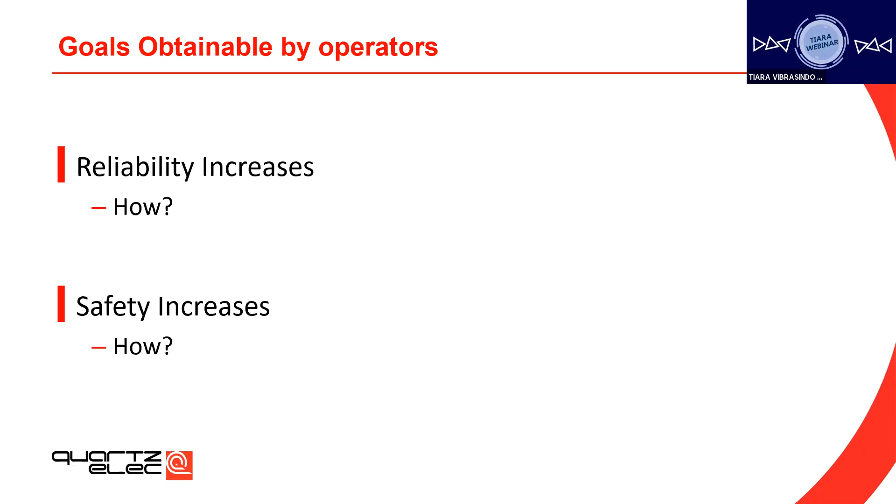I believe many of you have joined from the maintenance department, and these are the questions often asked by your superiors and management. How can we increase the reliability of the machine or increase the life of the machine? How can we run the machine without failures? The answer is to receive alerts to the problems before the fault occurs. And how does safety increase? It's the same as above. You always have to receive alerts to the problems before the fault occurs.

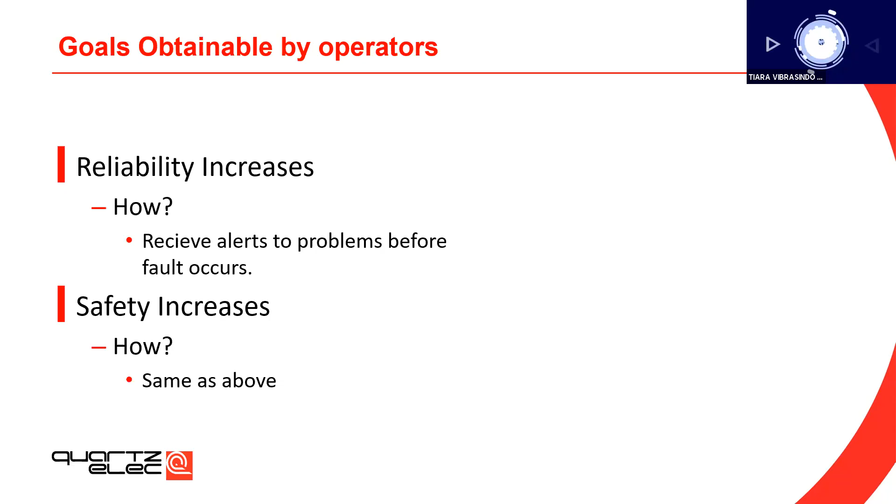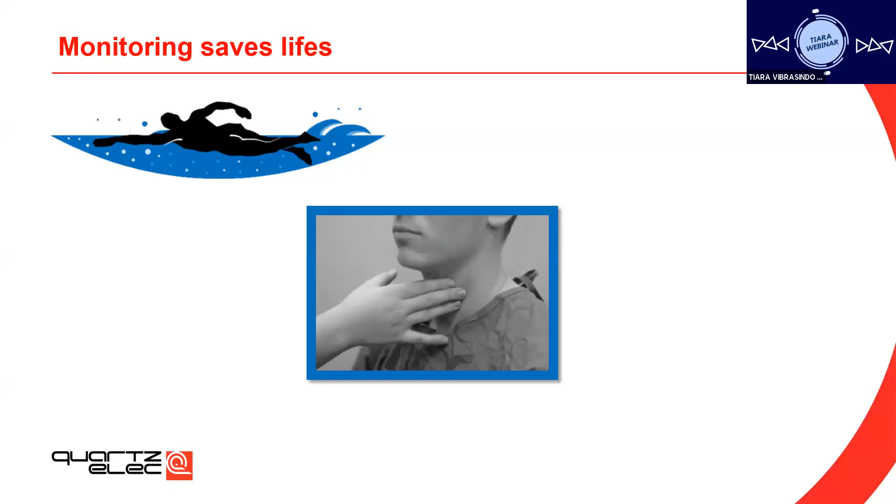This is a slide we can correlate with our daily lives. If you're an athlete, how would you prefer to check the pulse of your body? Would you still prefer the age-old technique of placing the fingers on your neck and measuring the pulse? Or would you prefer modern methods like health tracking systems, which show you heartbeat, number of steps you walked, sleep cycles, and whatnot? Frankly, this is how condition monitoring techniques have also evolved in modern days.

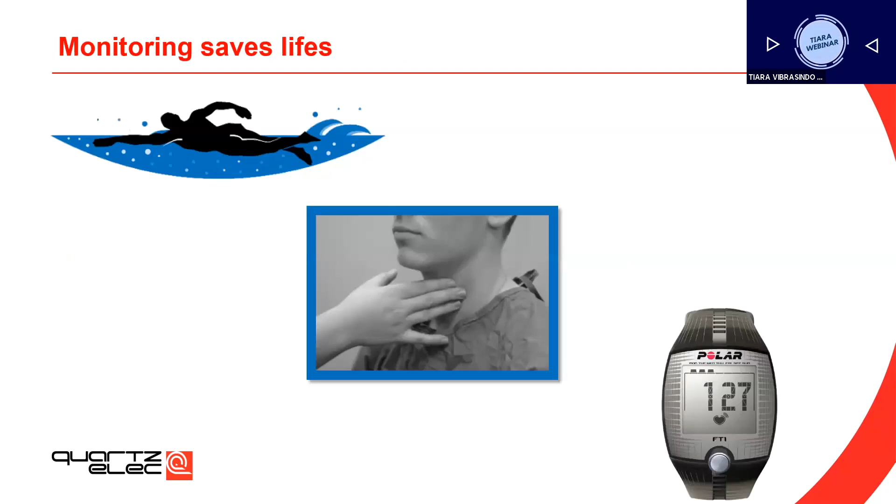The market drives mainly on aging infrastructure, rising costs to replace equipment, longer lead times for new equipment, and increased pressure to operate 24/7. Here are some of the benefits of using monitoring diagnostics. You can always avoid unplanned outages by having alerts before the faults, lower the maintenance costs, defer capital expenses by extending the asset life, and enable better decision making for the maintenance team.

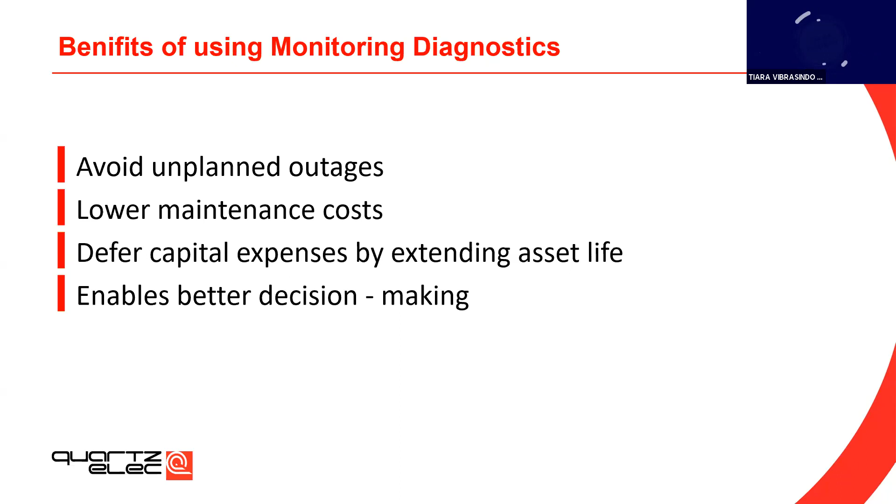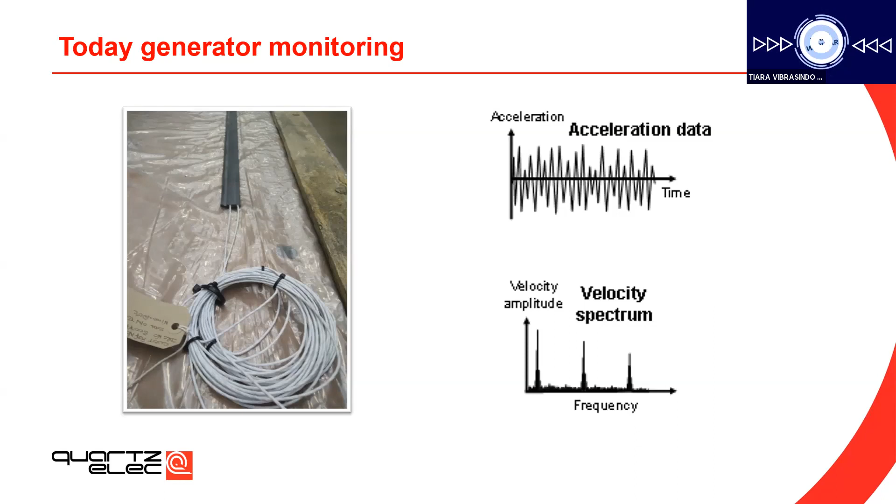Most of the machines are equipped with simple accelerometers and some vibration sensors. The question is, are these enough to monitor your machine's health to avoid catastrophic failures? Let us find out.

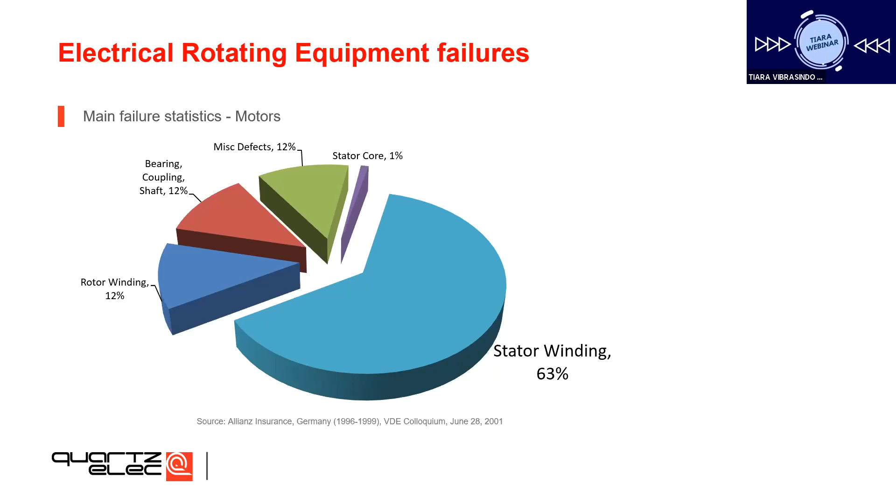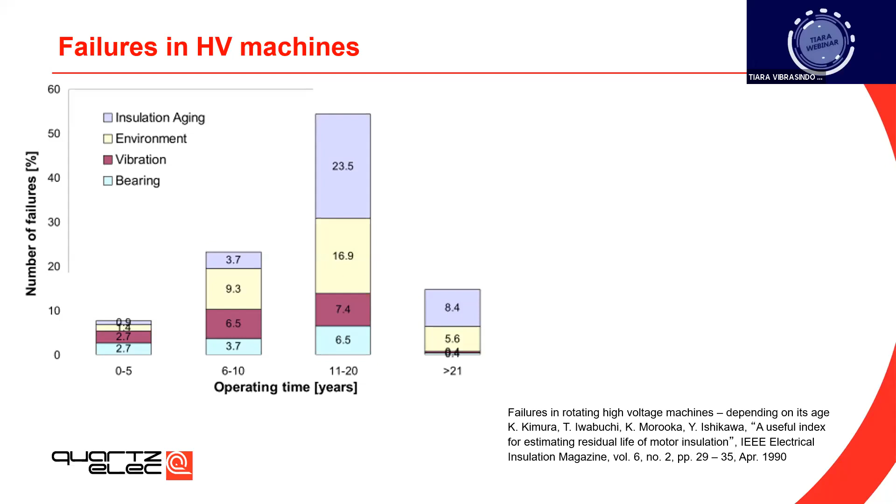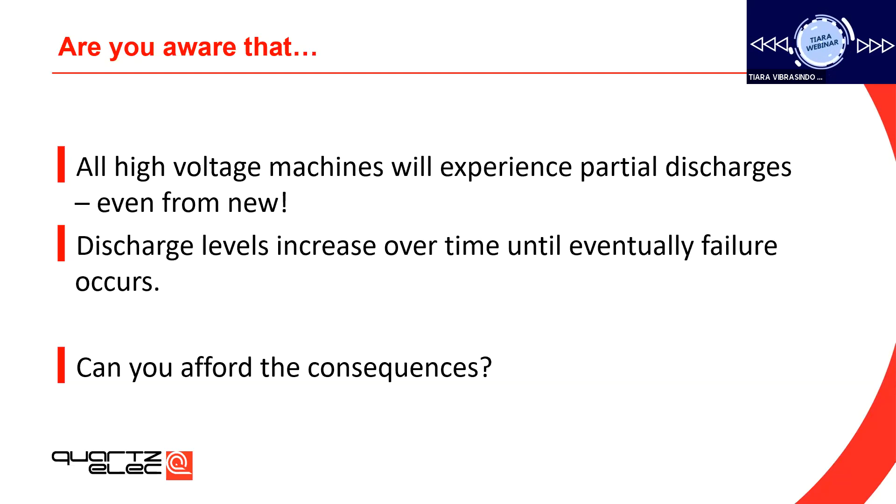I hope the slides we showed you have convinced you of how important monitoring your assets is. Just to add one more point, all high voltage machines will experience partial discharge, even from new. Discharge levels are low when the machines are new, but the levels increase over time, which will eventually cause failures. Can we afford these consequences? Of course not.

Let us now discuss more on partial discharge and its characteristics in rotating machines. What is partial discharge? A partial discharge is an electrical discharge that partially bridges the gap between the conductor and earth, or it can also happen between the layers of insulation or the insulation and the conductor. Technically, it can happen anywhere there's a junction between two electrical components. Partial discharge always happens between these two junctions, not completely bridging the gap, but occurring at some point between them.

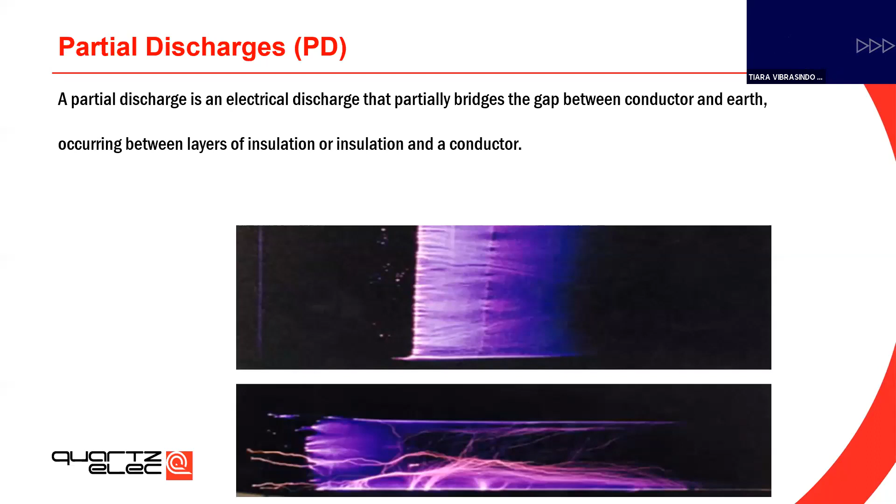So what are the conditions for PD? When a potential difference builds across an air-filled void due to the capacitive voltage divider, PD occurs if E is greater than 3 kV/mm. That is, the electrical stress exceeds the electrical breakdown strength of gas. The larger the void, the larger the discharge is.

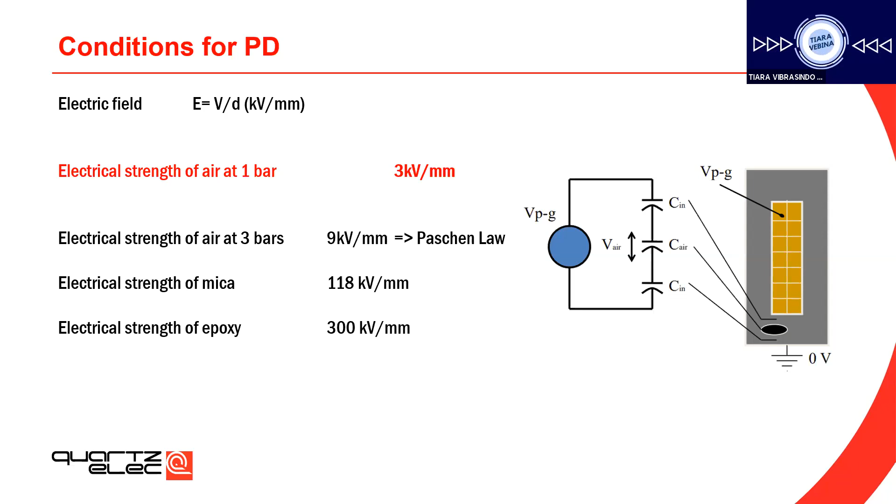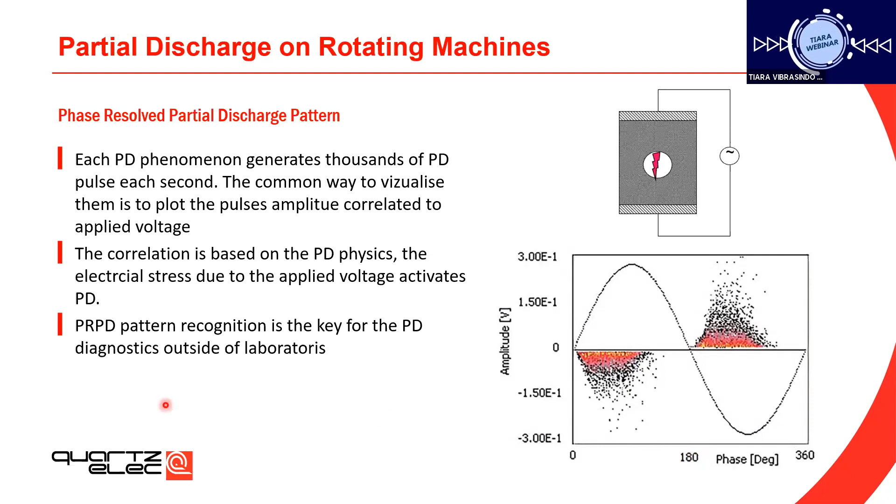We use the following PD test standards: IEC 60034-27, online partial discharge measurements on the stator winding insulation of rotating machines. Next one is IEEE 1434, which is a guide for the measurement of partial discharge in AC electric machinery.

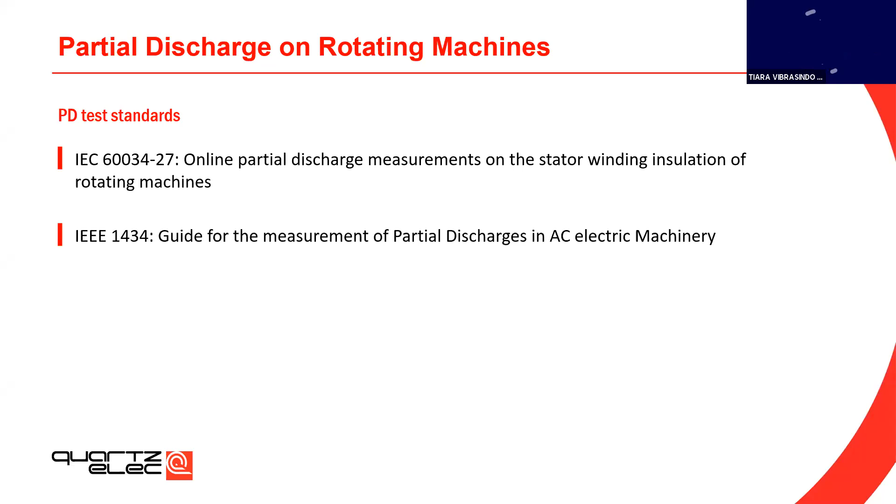We now move to the next section, which is very interesting, the causes of partial discharges. We come across customers who always ask if their machine has partial discharge. We say it is better not to argue with physics. As we have seen in earlier slides, every machine with voltage above 3 to 4 kV might suffer from partial discharges. So what causes partial discharge? Here is the introduction to TEAM stresses: thermal, electrical, ambient, mechanical. Together, we call them TEAM.

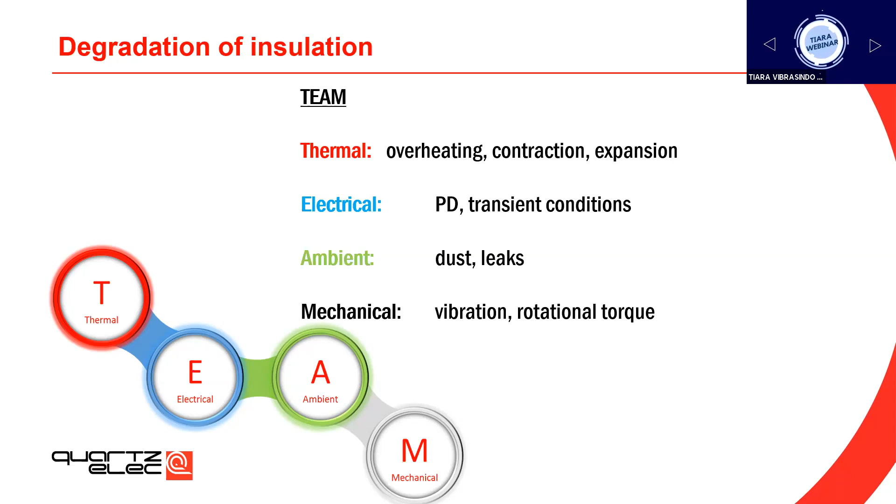The main cause of the partial discharge on rotating machines is TEAM stresses. TEAM means thermal, electrical, ambient, and mechanical stresses. We will go into each of the TEAM stresses in detail in the coming slides. The result of each of these causes is partial discharge. In general, effects we can identify by monitoring partial discharge on rotating machines are loose wedges, bar vibrations, slot discharges, broken conductors, end winding contamination, discharges between phases, delamination of the main insulation.

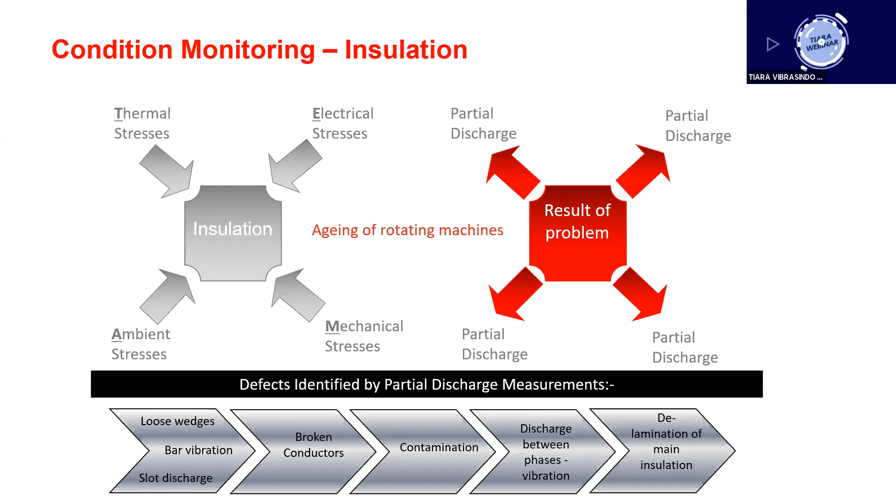Thermal degradations. These are one of the most common aging mechanisms. Studies state thermal stress results in relatively slow insulation degradations. So what are the reasons for these thermal degradations? The reasons are operation losses, for example, starts and stops of the machine, changes in the load, circulating eddy currents, sometimes the poor cooling design itself. Interestingly, every 10 degrees increase in the temperature decreases the remaining life by 50%.

As you all know, stator winding insulation is made of different materials, and different materials have different expansion characteristics. So what happens during the load cycling? Due to these different thermal expansions, loss of bonding between the conductors and insulation happens. This will eventually create voids and then PD.

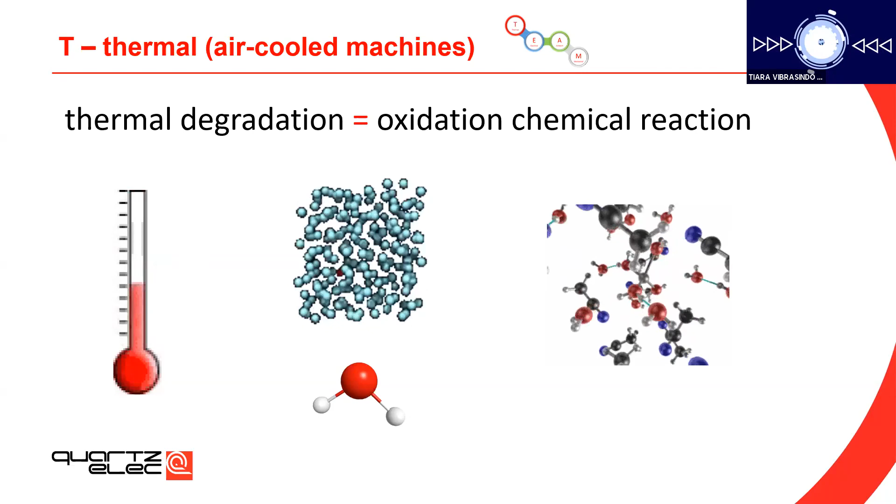The traditional way to measure winding temperatures is by RTDs and thermocouples. Actually, these sensors show lower temperature, up to 5 to 20 degrees, than actual copper temperature. Therefore, are these sensors good enough to alert thermal changes in your machine? We have to question ourselves. Having a PD monitoring system on your machine gives you better visibility of what exactly is happening with your stator windings.

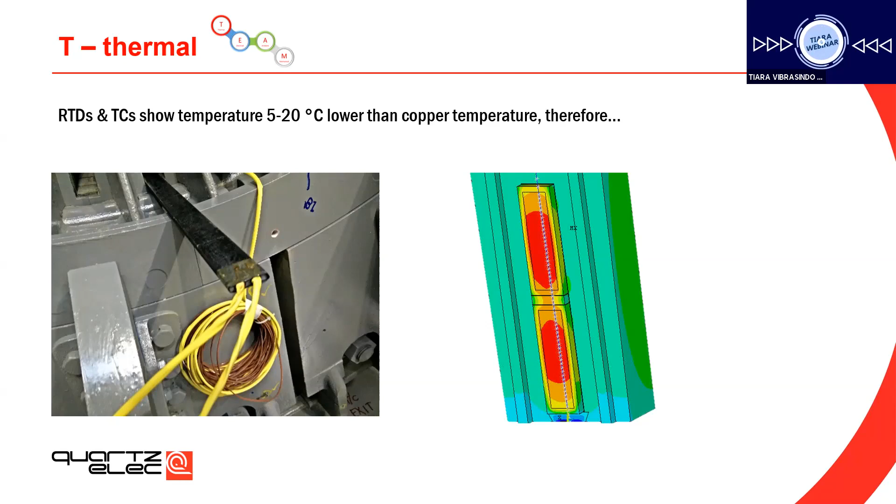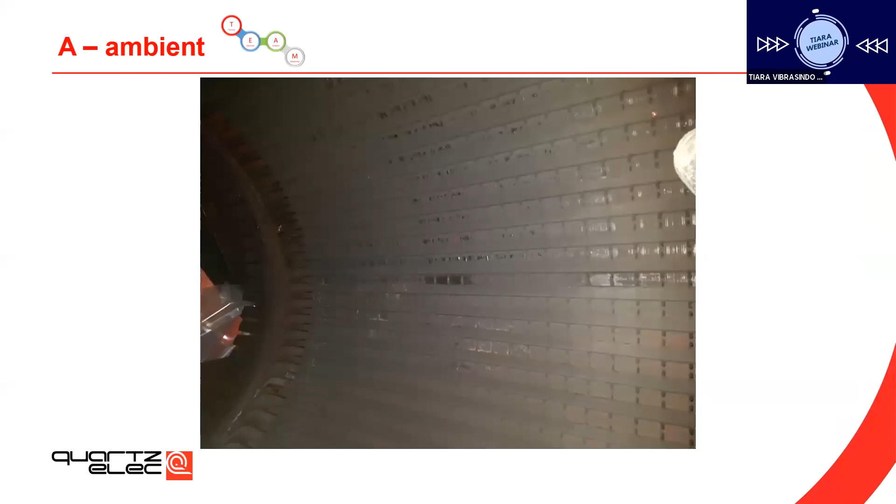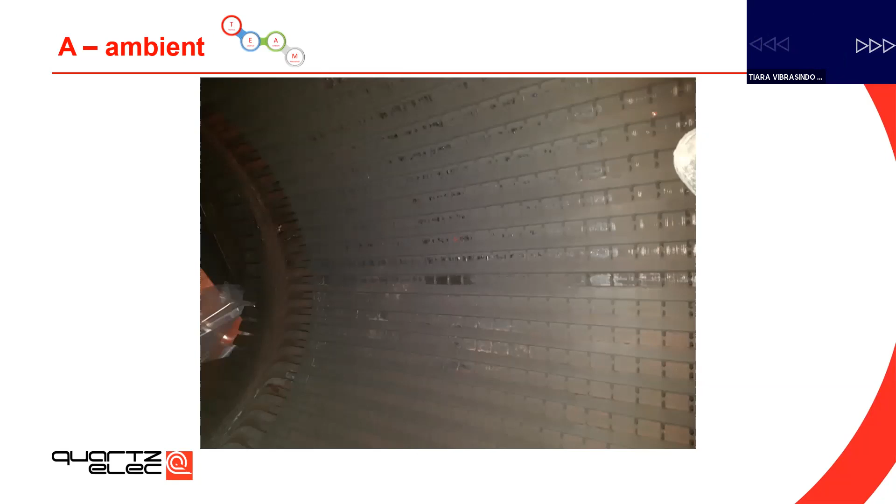Winding contamination plays a major role in the ambient stresses. These create tracking across the spaces between the coils of different phases. This also degrades the mechanical supports and surface insulation. Contamination together with moisture creates surface tracking which can contribute to insulation failures. Sometimes improper ventilation and heating speeds up these problems. The effect of ambient stresses on the winding is typically a long-term aging process. This will be ranging from months to years.

This slide shows you a very good example of the effect of ambient stresses on the windings. We have conducted partial discharge tests two times on the same machine. On the left, before cleaning, that is, the winding is with oil and dirt contamination. On the right, the test has been carried out after the cleaning, that is, after the cryogenic cleaning of the windings. So clearly, on the right, we can see the amplitude of PD has decreased quite a bit. This shows the more the contamination on the winding, the more the PD is.

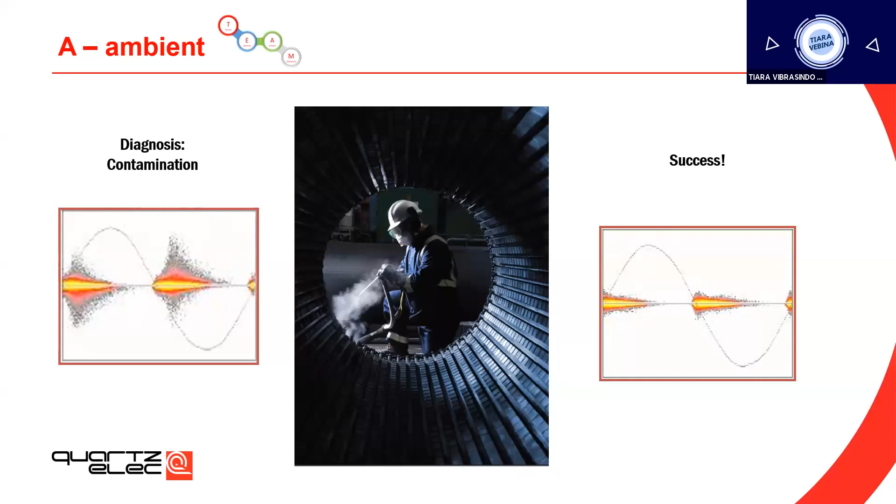Mechanical forces or mechanical stresses. This is the most important member of TEAM forces. In general, the vibration forces increase with the operating currents, which will eventually lead to the increase in insulation abrasion, winding settling, looseness in the wedges, and end-arm support weakness. Mechanical forces are the main causes of slot discharges, end winding strands, and turn cracks. These will lead to relatively quick failures when compared to other forces.

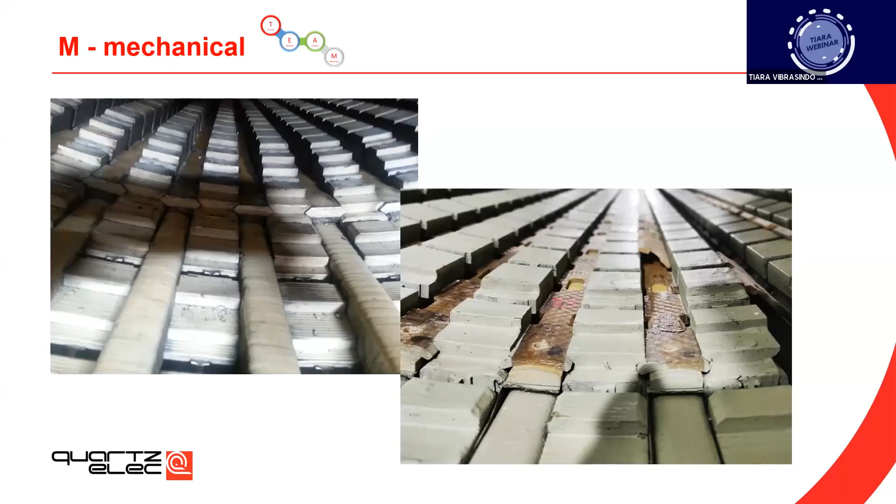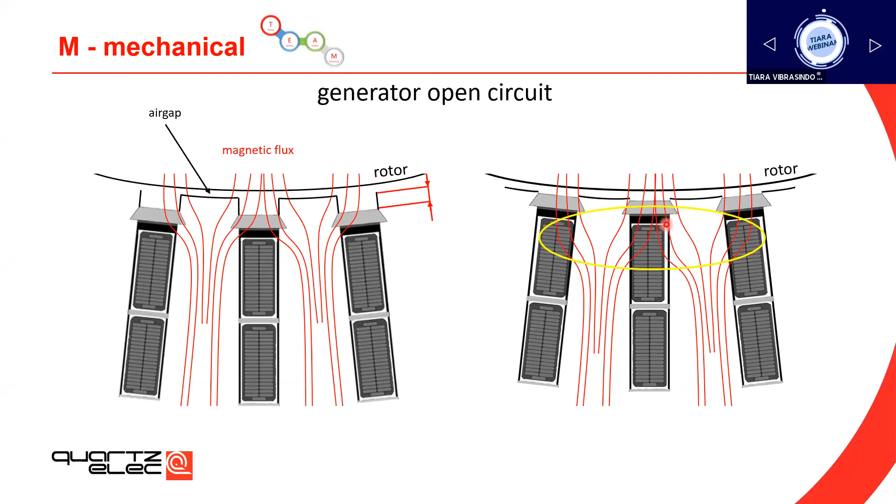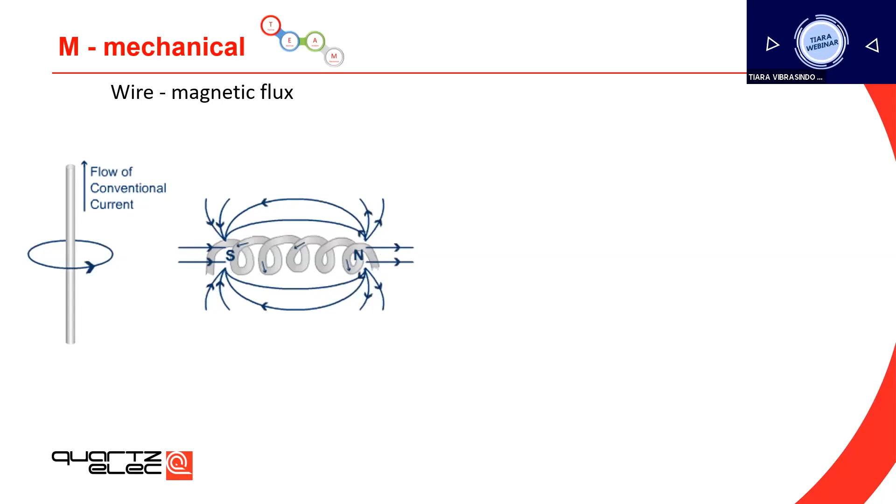You might remember that when a current flows through a simple wire, a magnetic flux is being created around that wire. The same happens when the current flows through the stator winding. And over time, the semiconductor layer can be damaged, triggering partial discharge. This can eventually lead to the main wall breakdown as well.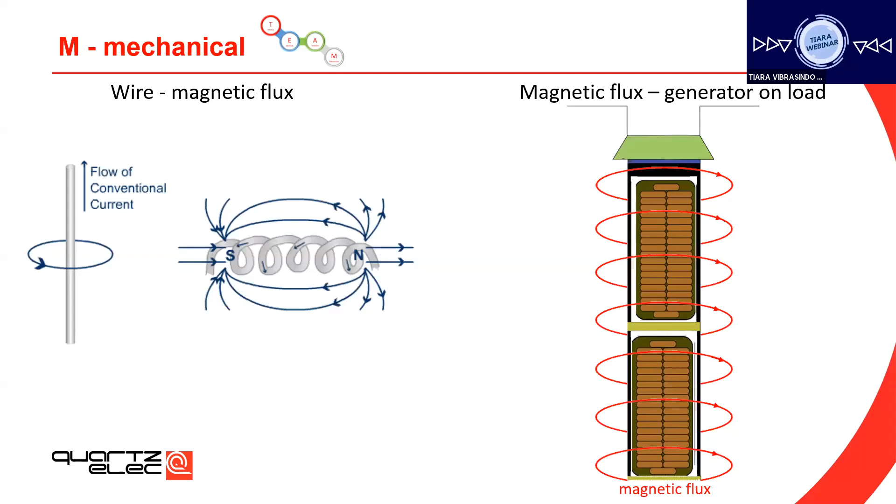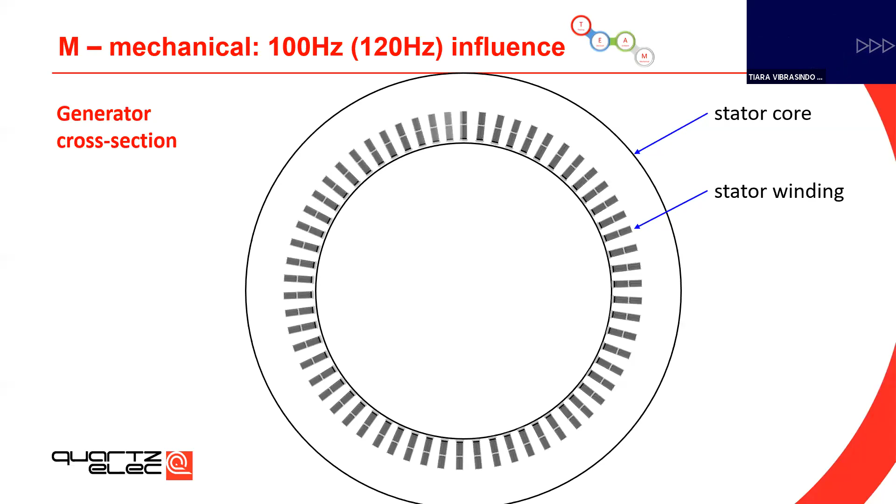Now we'll discuss the effect of resonant frequencies on the machines. That is 100 Hz for the 50 Hz network and 120 Hz for the 60 Hz network. These are the main forcing frequencies for two-pole generators and windings. Your generator becomes oval to some degree because of these forces. Unfortunately,

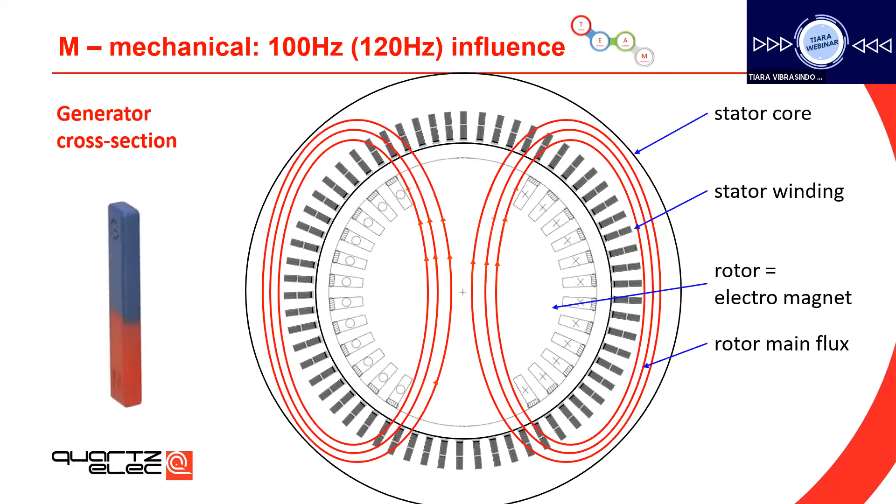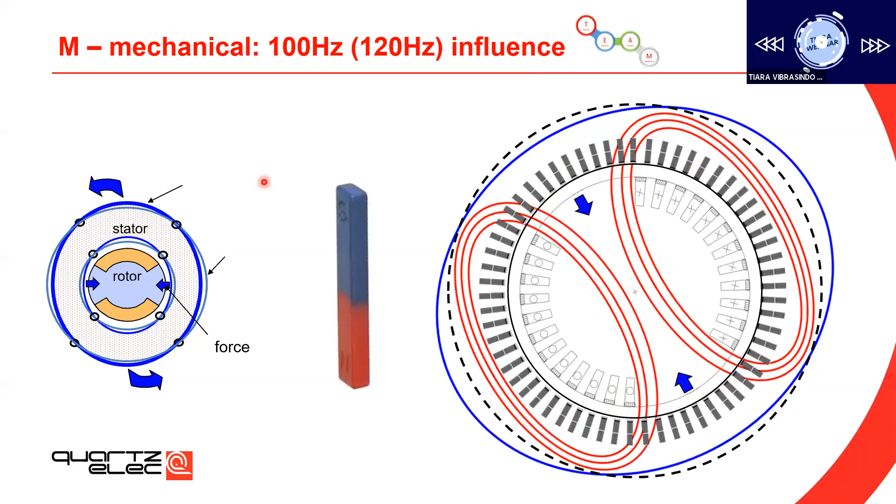remember, two generators, even though manufactured as identical, might still behave uniquely with different natural frequencies. Also, it is worth noting that the natural frequency values depend on the change of temperature. Resonant vibration such as this has been a cause of major failures in the past, resulting in significant downtime ranging from weeks to a number of months, with obvious implications in terms of cost, generator availability, and revenue loss.

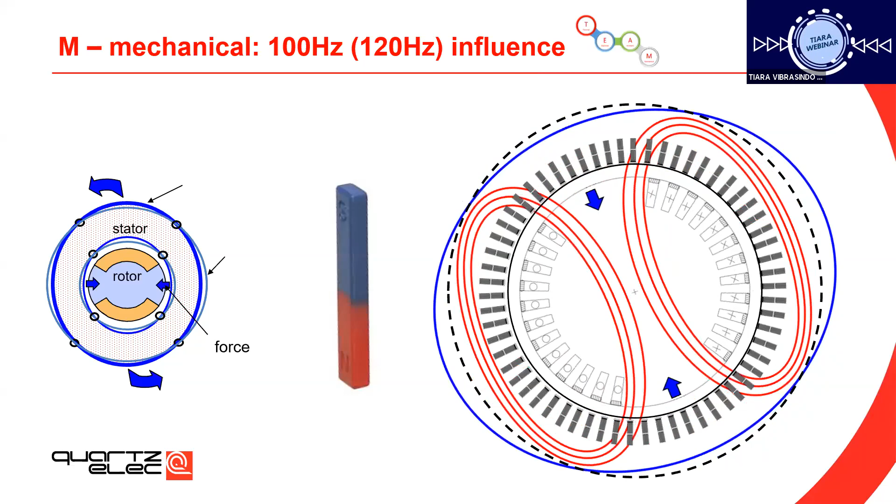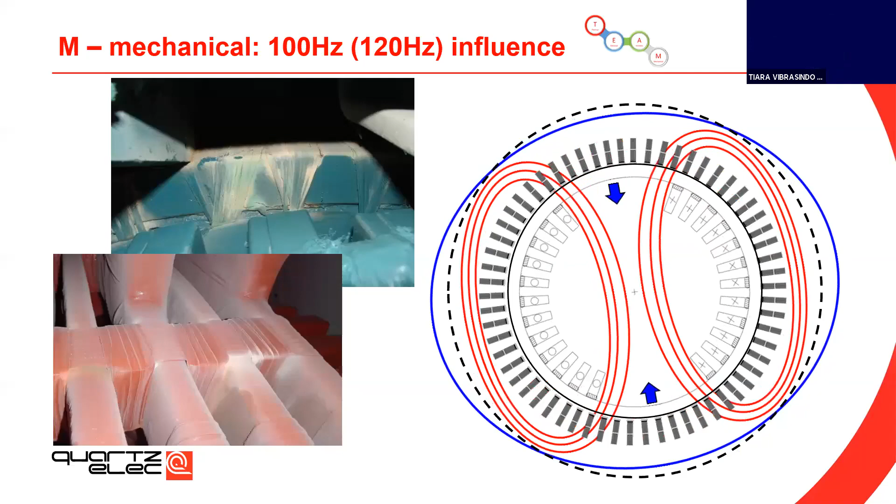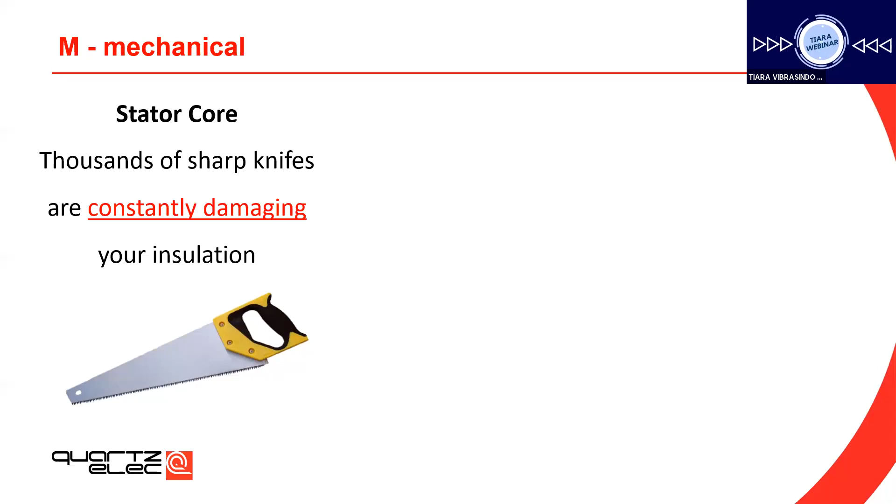The end result of these forces on your machine is what you see in the picture on the left. Just imagine the combined mechanical forces happening on the machine winding, and the winding is vibrating against the rough surfaces. That's right. The impact of these forces is quite severe. It's like thousands of sharp knives constantly damaging your insulation.

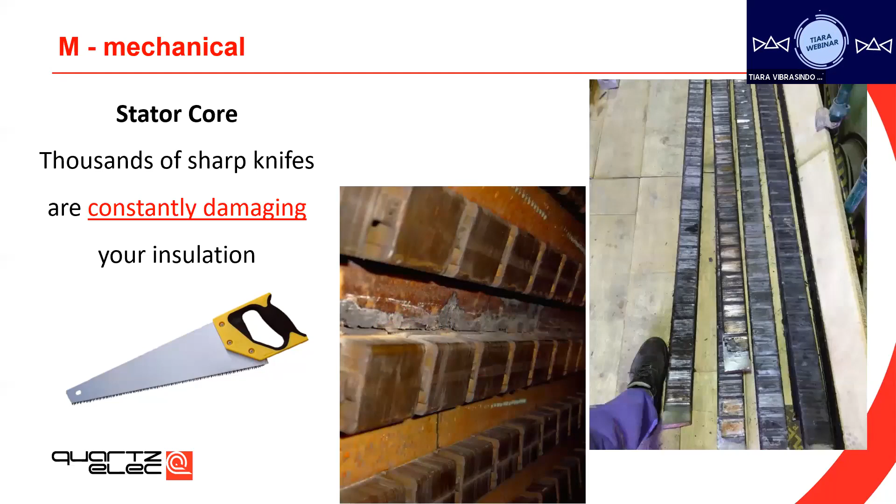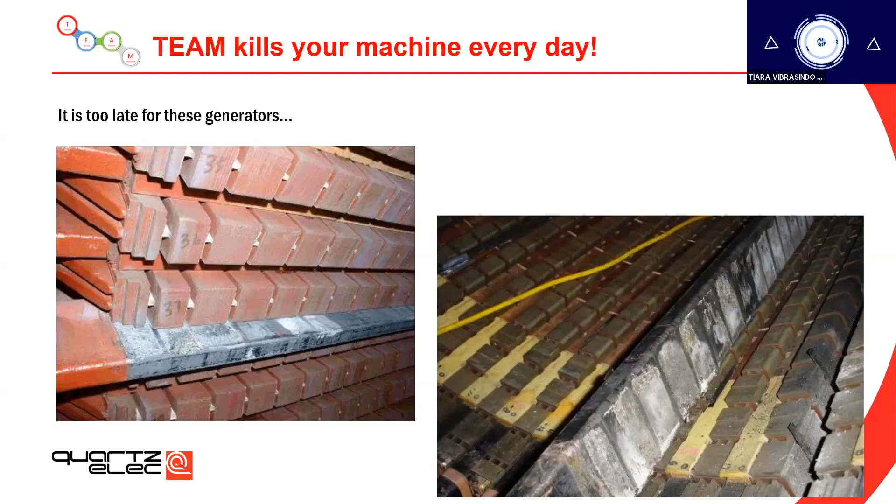TEAM forces kill your machine every day. It's too late for these generators to get life again. Start monitoring and avoid these failures. There are a few other factors other than TEAM which could cause partial discharge on your machines. Those are badly designed windings, clogged coolers, poor winding quality itself, and global VPI technology.

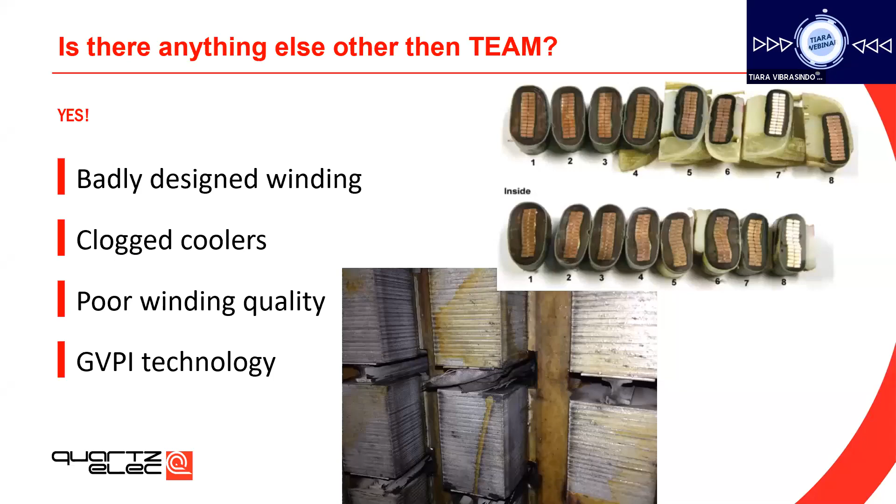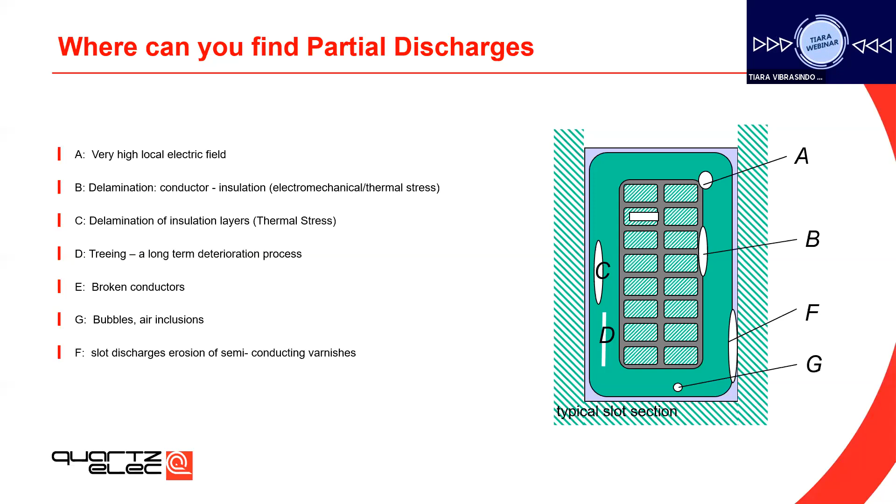Partial discharge is a very fast transient pulse, and this can be measured by various techniques. Some of them are electromagnetic pulse, light emission, ultrasound wave, and electrochemical reactions, which is also called ozone. Any of these can be used to measure the partial discharge. Electrical PD sensing is the most common technique, as this allows us to quantify the partial discharge phenomena.

Let us now get into the new chapter, selection of partial discharge sensors. Before getting into the sensor typology, let us see how to detect the signal itself. The localized insulation defects subjected to the electrical stresses generate PD signals. This phenomenon is the source of high-frequency electromagnetic signals. The conducted signal path can be forced into the sensor and measured, while the irradiated signal is subject to the generator design. Those can attenuate and affect the sensitivity.

Different sensors produce different PD outputs, and they have different sensitivity as well. Some have the sync signal and some don't. Let us discuss the differences between three types of sensors: capacitive, HFCTs, and antennas. Antennas provide very high local sensitivity. But as you know, we require more of these sensors to cover a complete area. The capacitive sensors provide better sensitivity than HFCTs. When it comes to installation, antennas require very high effort. When it comes to safety, antennas provide higher safety compared to HFCTs and capacitive sensors.

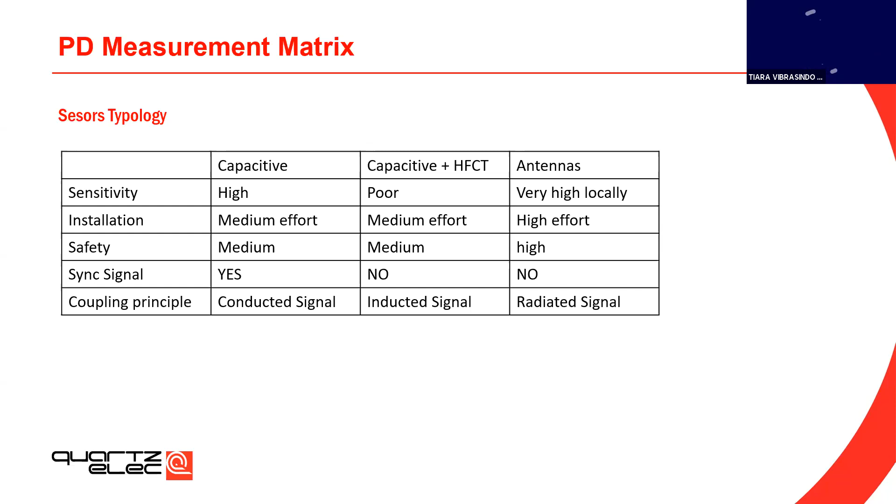Signal attenuation plays a major role in the selection of sensors and also the measurement of the partial discharge signal. Measurements at lower frequencies create noise problems. Measurements at higher frequencies create attenuation problems. Our field experience indicates that using the 1 to 20 MHz frequency range for measurements, with additional digital processing based on the PD pulse characteristics, works very well to detect PD activity in the industrial environment. It also helps to locate a particular area with PD activity and distinguish internal PD activity from external noise.

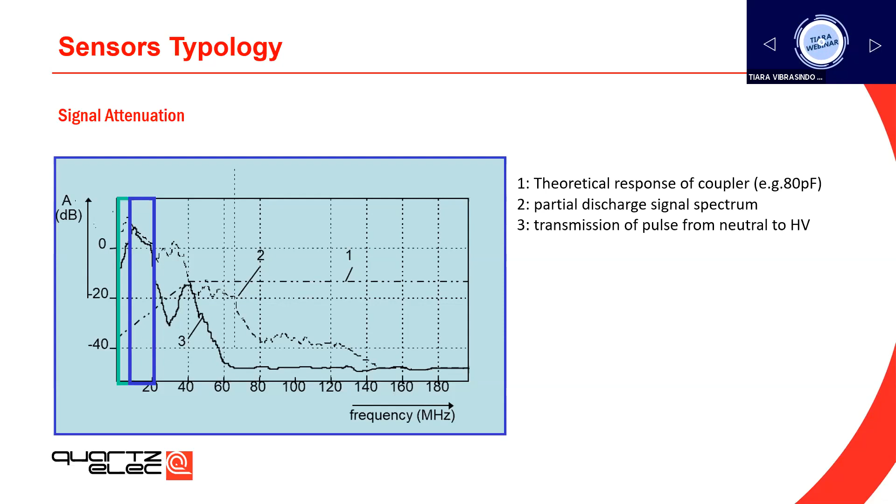When it comes to traditional factory testing, they use a very low frequency band, 25 kHz to 800 kHz, because they have a controlled environment, shielded rooms with very little or no noise. But when it comes to the field environment, noise does exist. So devices must move on to higher frequencies to eliminate the noise.

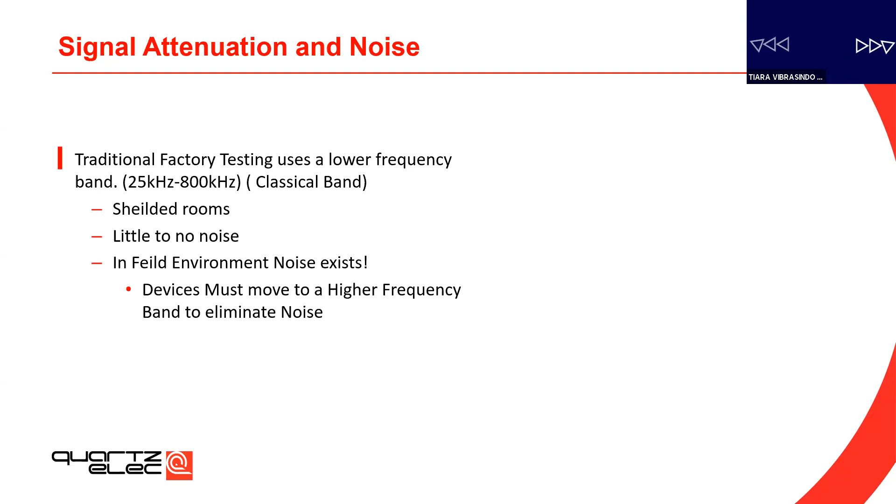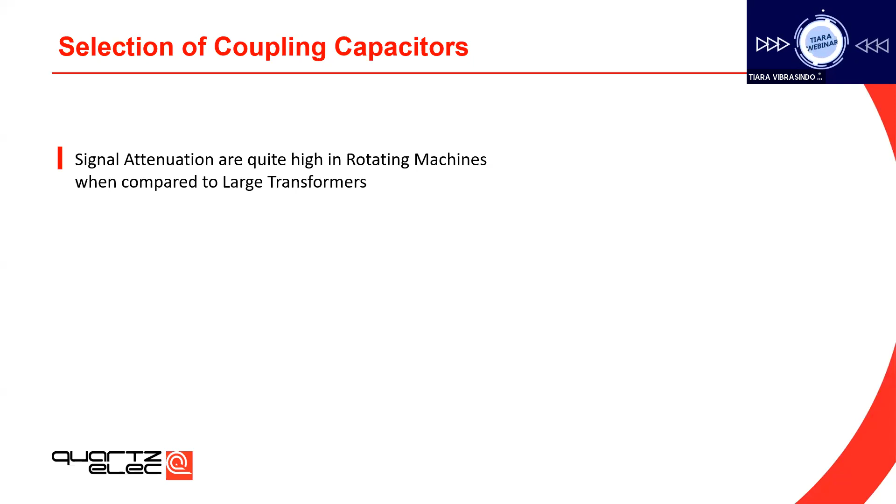These are some of the points which you need to consider before the selection of sensors. Signal attenuations are high in the rotating machines when compared to the large transformers. The higher the frequencies, the more attenuation there is. Noise does exist. The higher frequency you go, the lower the noise floor. But the problem is, the higher the frequencies, the more the attenuation is. Selection of the right frequency band is very important, by compromising between the attenuation and noise.

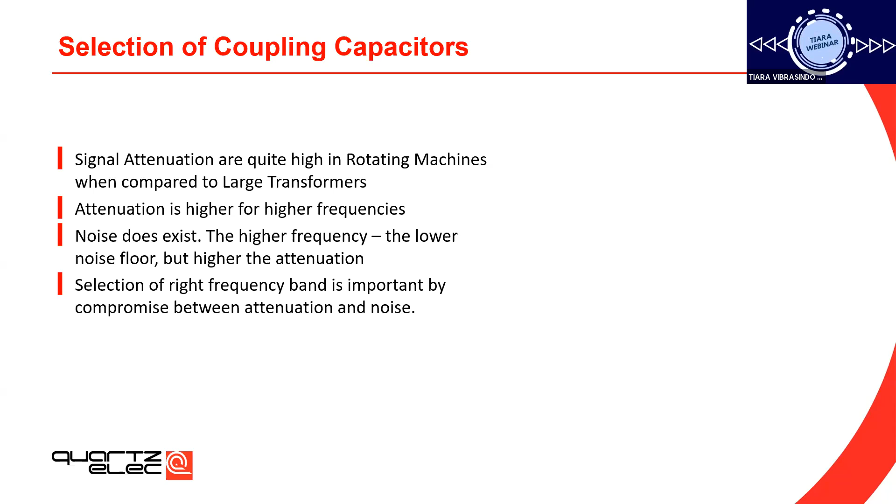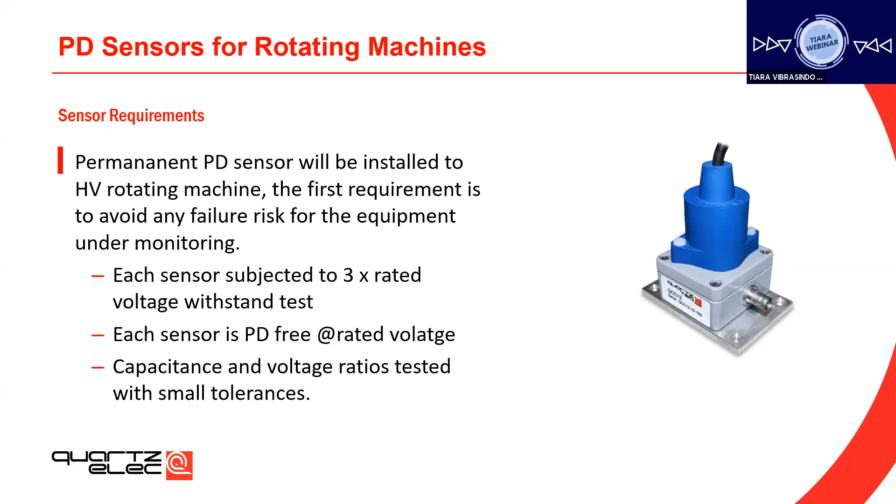The very frequent question asked to us is, can we compare the offline partial discharge data with online partial discharge data? And what is the advantage of having online PD monitoring systems? So let us study some of the differences, advantages, and disadvantages of offline PD and online PD. Offline PD test is carried out usually during an outage where we can connect a temporary PD capacitor coupler. We inject voltage into one of the coils and we measure one by one with a PD portable instrument.

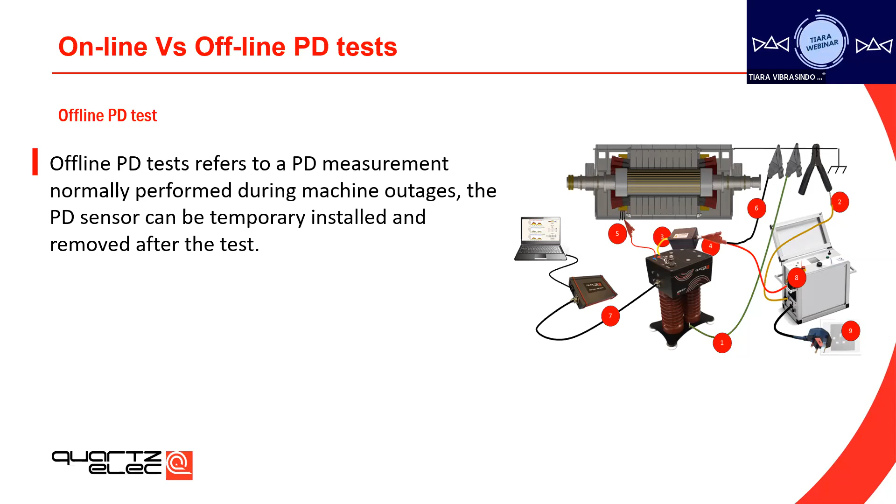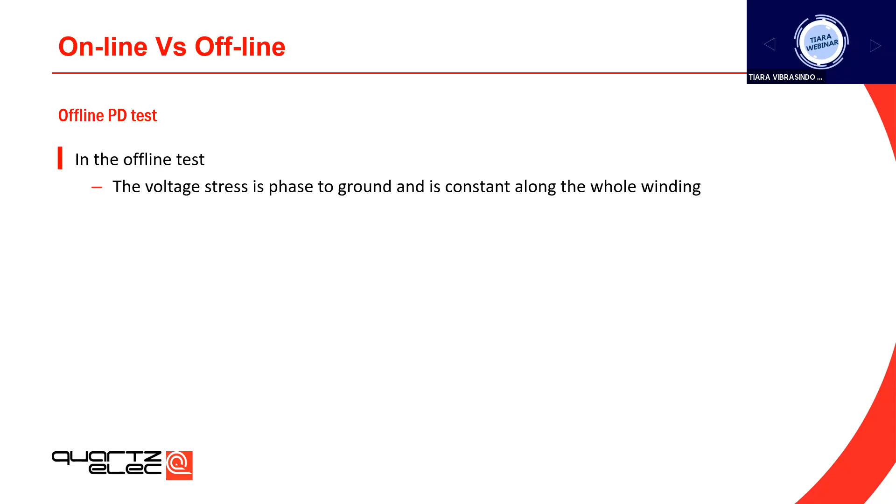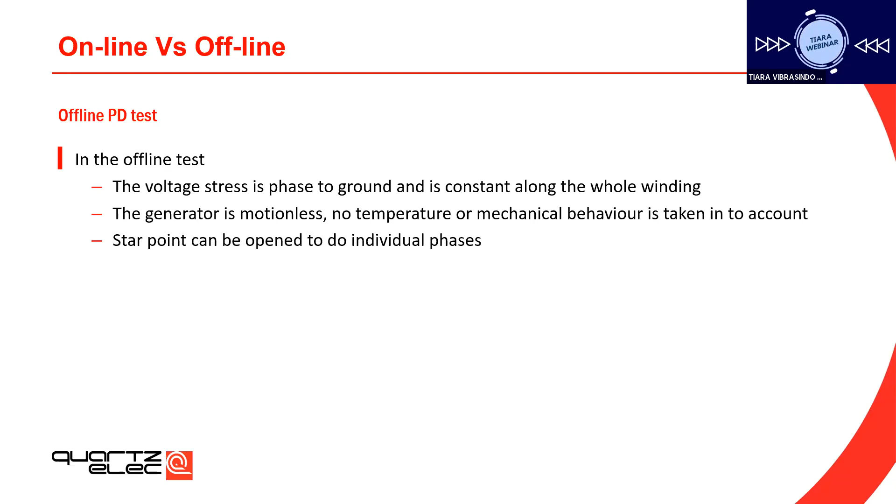These are some of the technicals which you need to know for the offline test. For the offline test, the voltage stress is phase to ground and is constant along the whole winding. The generator is motionless, so there is no impact of temperature and mechanical stresses. The star point, which is also called the neutral point, can be opened to do the individual phases and to compare them. The machine under test is isolated and is free from all the high frequency disturbances.

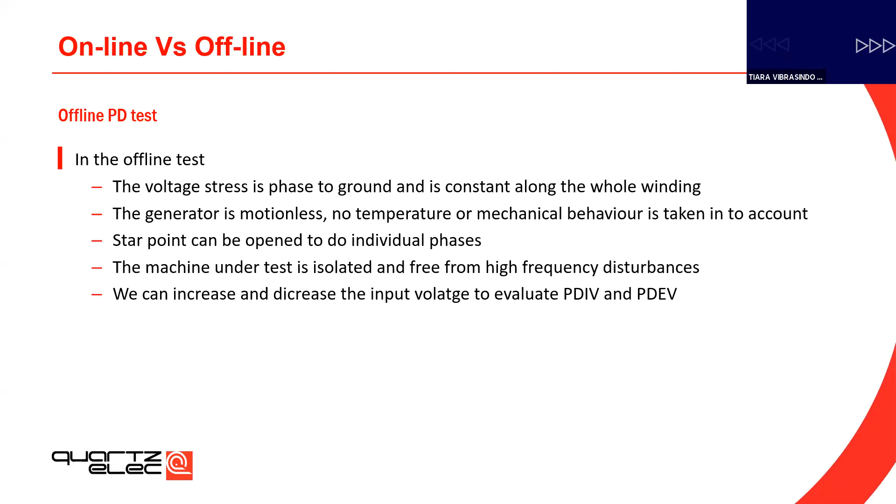One more advantage of this offline test is we can increase and decrease the input voltage and evaluate PD inception voltage and extinction voltage. It is also possible to overstress the insulation with respect to the normal conditions. Online PD monitoring on a running generator requires permanent installation of PD capacitor couplers. We can either measure the PD with mobile or permanently installed PD data acquisition systems.

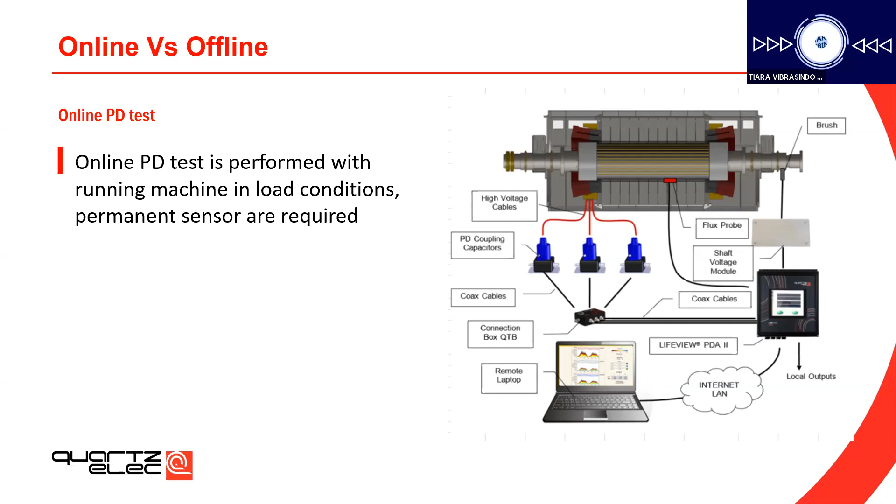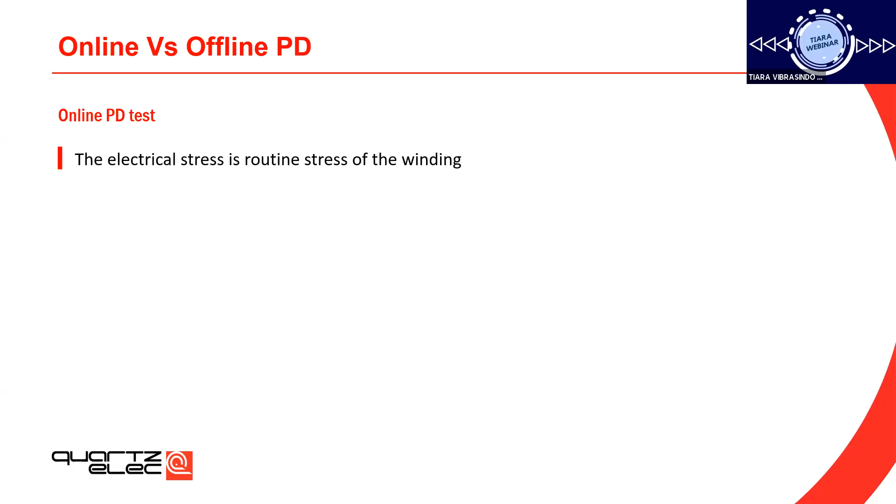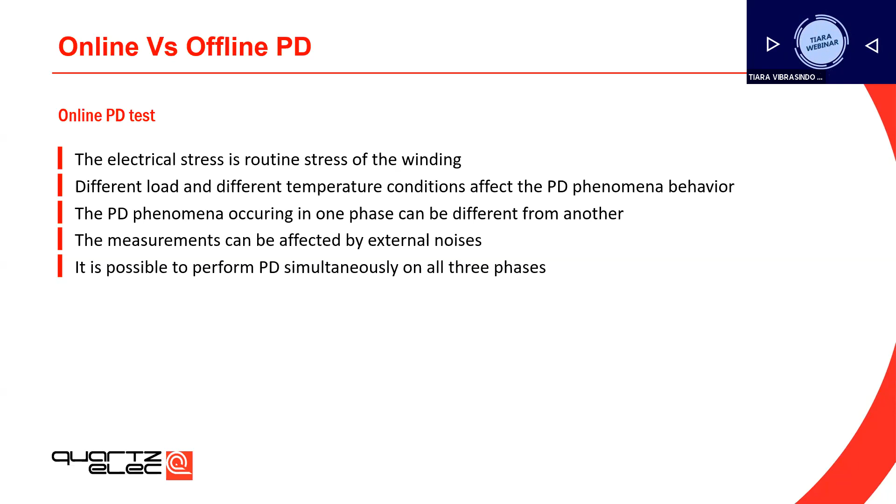For online PD tests, these are some of the technicals which you need to know. The electrical stress in the online test is the routine stress of the winding. Different load and temperature conditions affect the PD phenomenon behavior. The PD phenomena occurring in one phase can be different from another. The measurements can be affected by external noises. It is possible to perform PD simultaneously on all three phases. The permanent PD sensors help to correlate the machine lifetime and provide homogeneous data. Obviously, this can always be performed in a safe condition.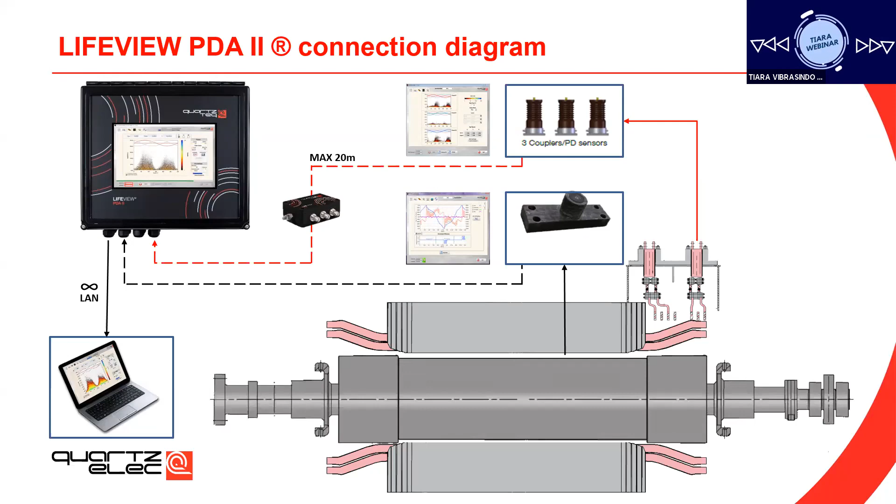In this slide, you can see some of the pictures of our installations. On the right side, it is PDA II monitoring systems. And on the left, you see the coupling capacitors rated for the 12 kV machines.

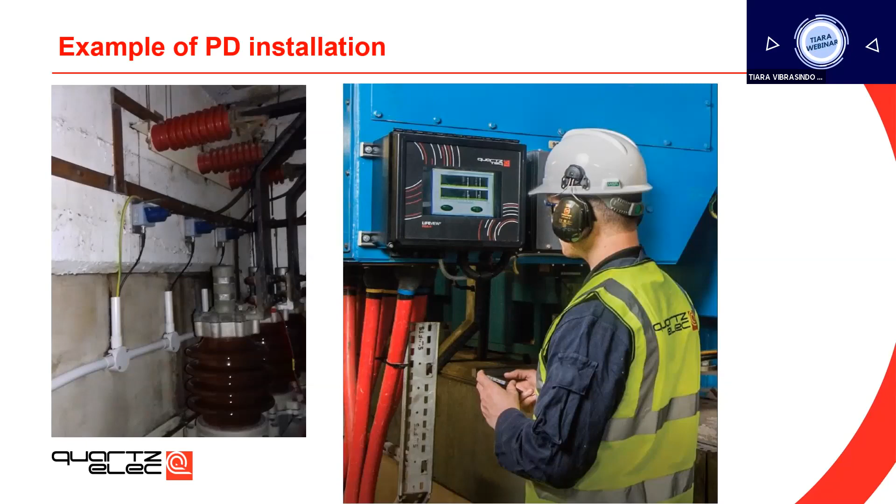Offline tests versus online tests. You guys have to tell me which one is the better one. So as you know, PD has become a standard diagnostic test performed on every HV machine these days. There is, however, a difference between online and offline tests. Both are valuable diagnostic tools, but only one gives you a real picture of your stator winding condition, which is an online test. Online monitoring simplifies the process of trending and makes PD results more visual compared to the offline tests. It helps to understand what is causing PD level changes in an insulation system.

Online monitoring allows us to see the seasonal and other variations in the levels caused by certain dynamics such as temperature, humidity, and load, and to distinguish these changes from the maintenance effects and steady deterioration of the insulation. Online partial discharge levels are also a useful indicator in determining the success and failure of maintenance activities.

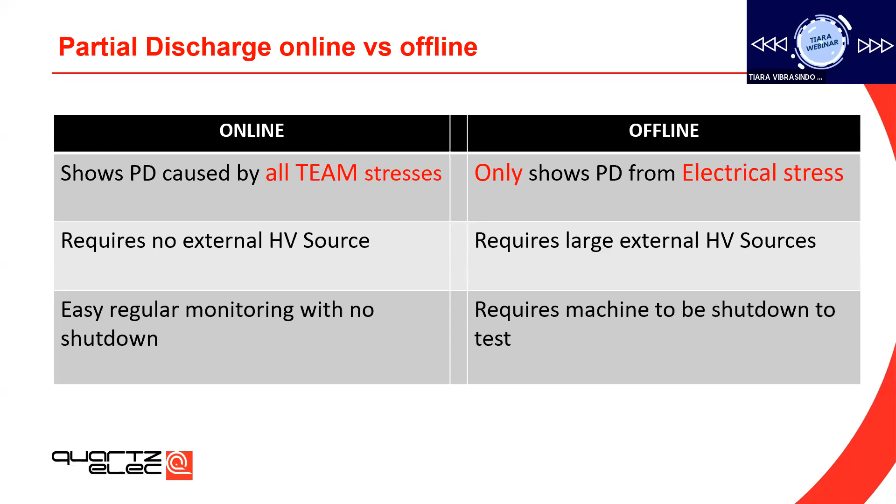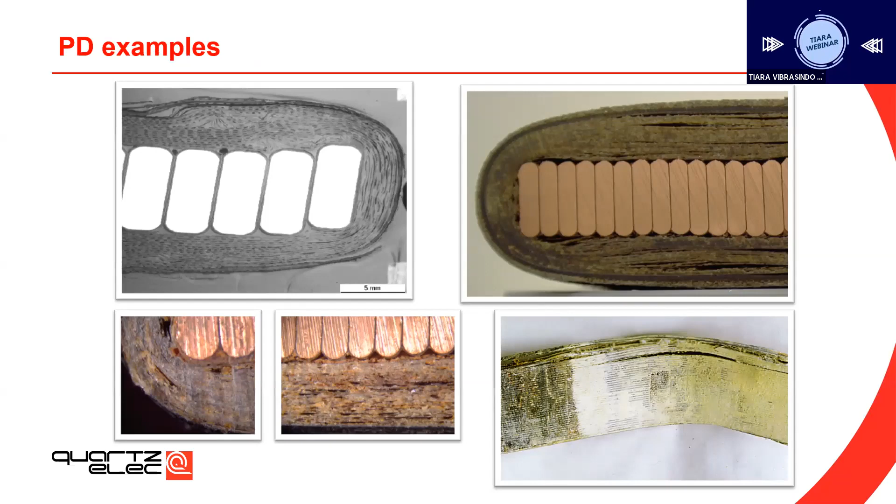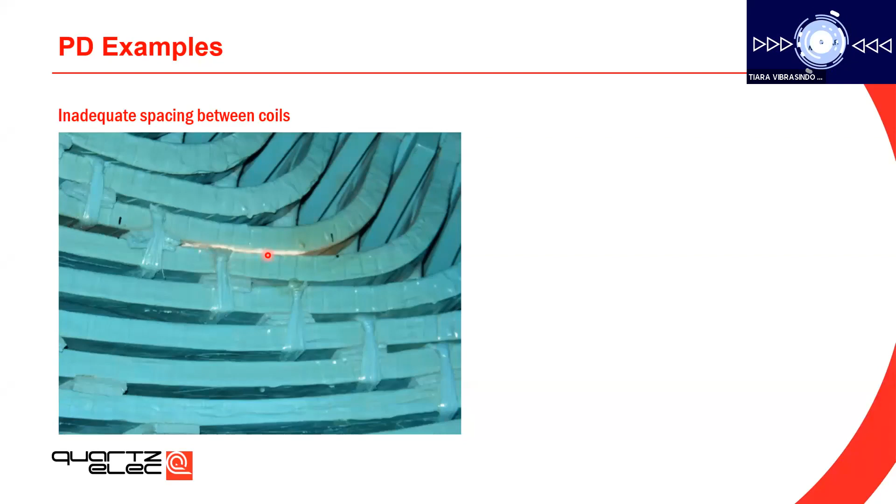Let us see some examples of PD. So here are some of the pictures showing the PD caused by delaminations in the insulation. In this slide, we have a picture showing the PD caused by inadequate spacing between the coils. Here is another PD example. It shows PD caused by loose coils in the slot.

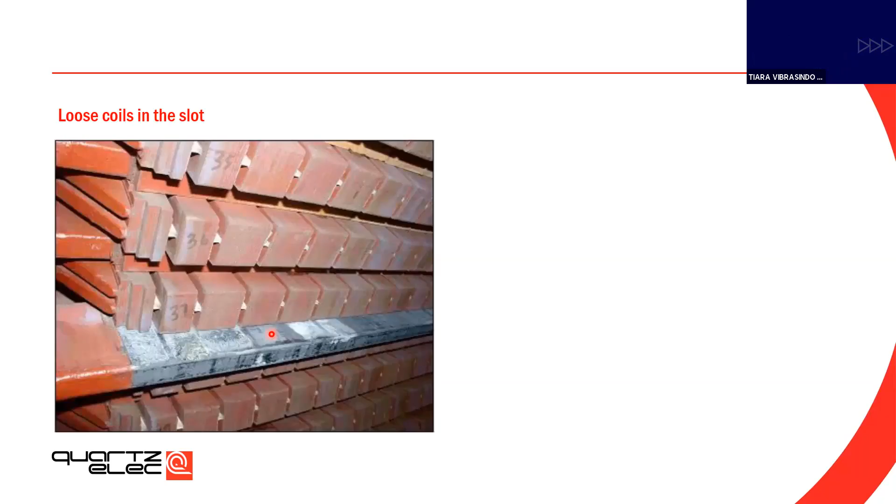Let us see some of the case studies where we experienced by measuring the partial discharge data. So we have a refurbishing stator here. Before refurbishing, you can see the PD levels are different on all three phases, red, green, and white. Same Q, it applies for both QM and Qpp. The values of Qpp are up to 3.18 and QM are up to 3.06. So after refurbishment, you can see all three values are same and they're ranging around 2 nanocoulomb.

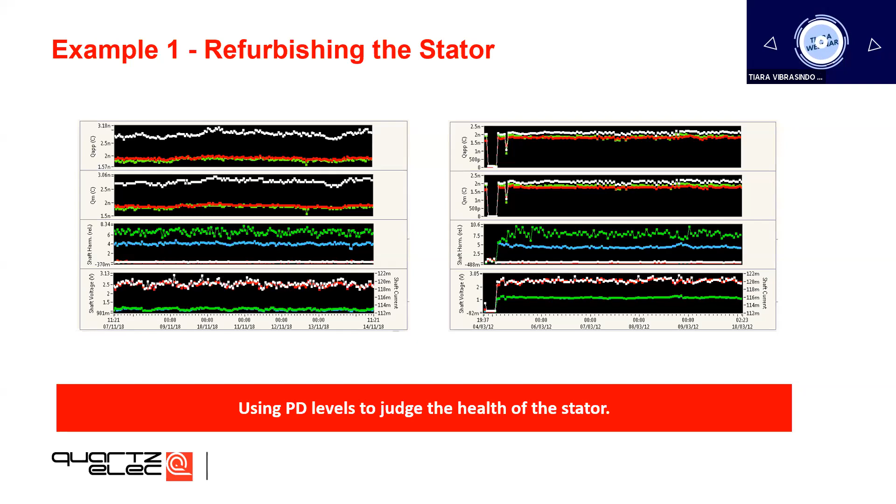So this is a typical example which shows how PD levels can be used to judge the health of the stator. Here is another example of 480 kilowatt two-pole motor, which has been in service for only 6 years. This motor was noted as having high PD signature on V phase compared to the U and W phases when measured online.

This was confirmed again by doing offline PD tests during the overhaul, and the line end shows visible PD indication due to the low end winding clearances. This was then treated with the stress grading paint at the line ends, and PD was reduced back in line with the other two phases.

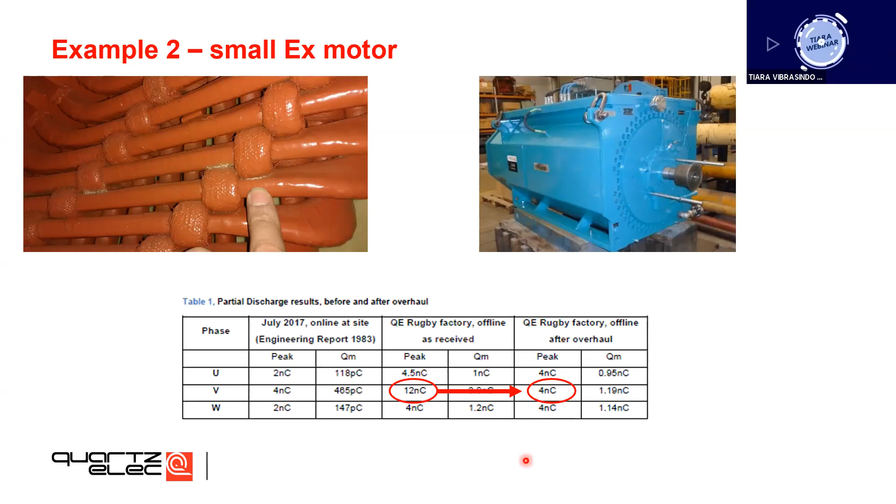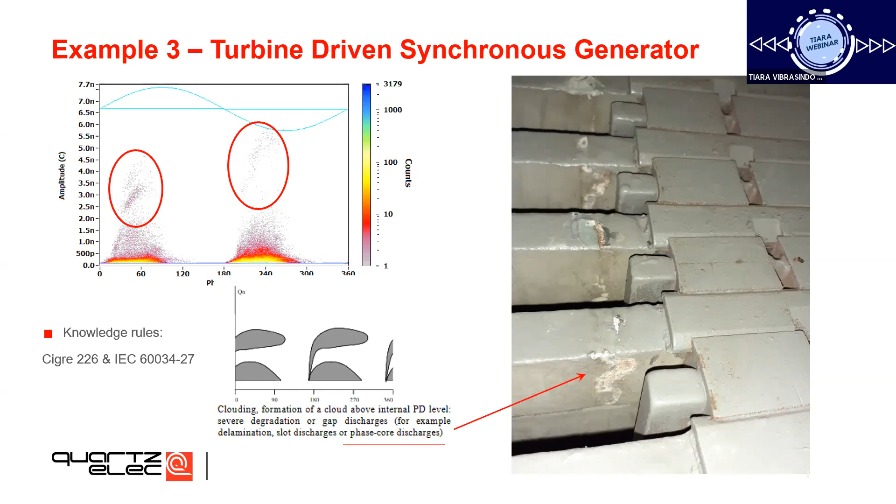Here I end my presentation by saying PD monitoring helps to assess the insulation health of hydro generators, turbo generators, motors, and other rotating machines. Insulation failures are costly and it can be disastrous. So it's better that we avoid these insulation failures by start monitoring now.